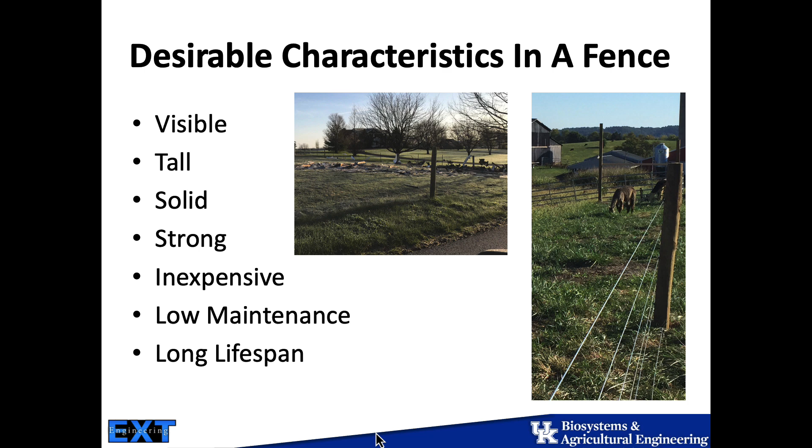Our goal today, again, is to help you build a fence that's going to last 20 to 25 years. If you do that and you choose good materials, then I think that can be accomplished with some minimal maintenance. So these are common fencing types that we see here in Kentucky. Wooden plank, and we've got woven wire fence. That'd be our traditional hinge joint type of woven wire fence, usually with a less than ideal galvanization on it, so it lasts 4 or 5 years and then it starts to rust.

We've got a better type of woven wire fence, and that's a fixed knot high tensile fence. That'll be the one we're showing you all how to put up today. That's got a class 3 galvanization or better. That's going to last 20 to 25 years without rusting. We've got a smooth high tensile electrified fence.

We generally don't recommend smooth high tensile fence without electric on it, because animals will tend to stick their heads through that fence and push the wires apart. So really high tensile fence needs to be electrified, and we'll talk more about that. We'll have a demonstration of a subdivision fence that's constructed with smooth high tensile wire, these black insulated line posts, and it will be electrified.

And then we have barbed wire. Commonly, when we talk about barbed wire, people think about that as a low-cost option. And I'm going to show you some numbers from a fence cost calculator that shows that barbed wire is probably not always our lowest cost fence to put in. And it's not a great fence to install, and it's not a great fence to maintain.

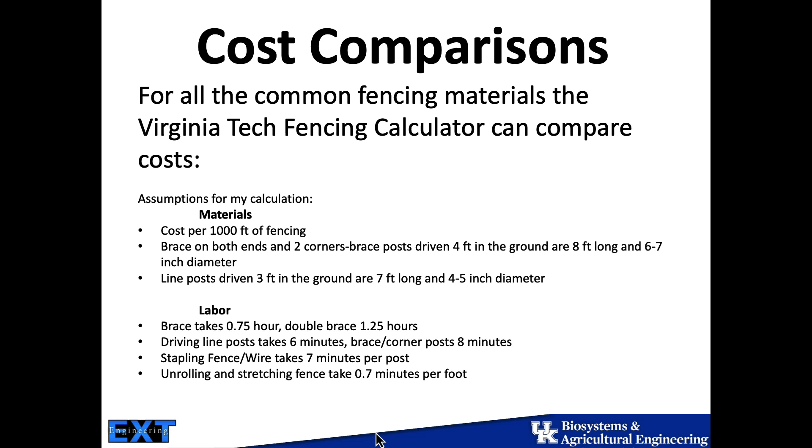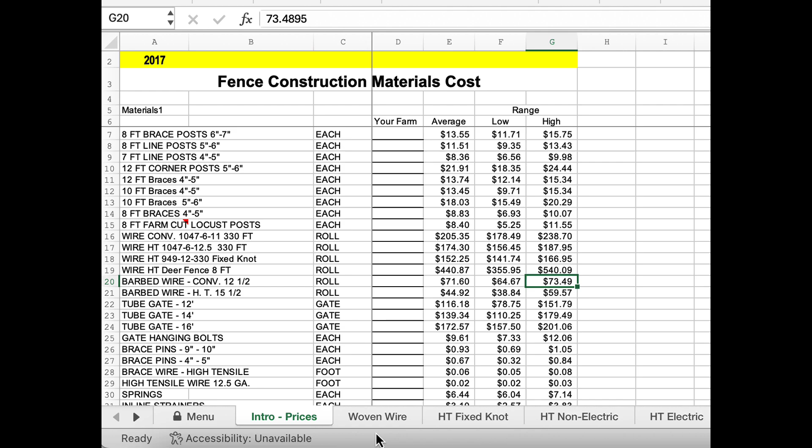And this is kind of what the calculator looks like. So this is the main menu, and it's got different types of fencing on there. You can click on that, and it'll take you to that spreadsheet. And then it'll allow you to put your actual costs in. It was probably last updated about 10 years ago, maybe a little bit less, but it puts in an average cost and then a high and low price range. And then you can put in a cost for your own farm to do the calculations. And this is kind of what one of those sheets would look like after you put the data in and what you want to use for your particular fencing project.

So let's talk just a little bit about the different kinds of fence and then how much it costs for 1,000 linear feet of that fence. So the first one is wood plank fence. Probably our most aesthetically pleasing fence, right? When I look at a fence, if I want to look at something that's really beautiful, I go to horse country around Lexington and I look at a board fence like that. Gorgeous, right? Expensive. It's expensive to build, and it's expensive to maintain. So that's two downfalls of a board fence.

The other thing about this fence is it's a very nice visual or physical barrier, so they can see it well and they can respect it. That doesn't mean they won't rub on that fence and push the boards off. They probably will. That's generally why we recommend a 4-board fence and not a 3. 3 will keep animals in, but if you've got a 3 and they push a board off, then you've got two boards holding them in. A lot of horse farms around Lexington will actually use one electrified hot wire on the inside of this fence, behind one of the boards, and that will keep pressure off of that board fence and prolong the life of that board fence. So a really nice fence.

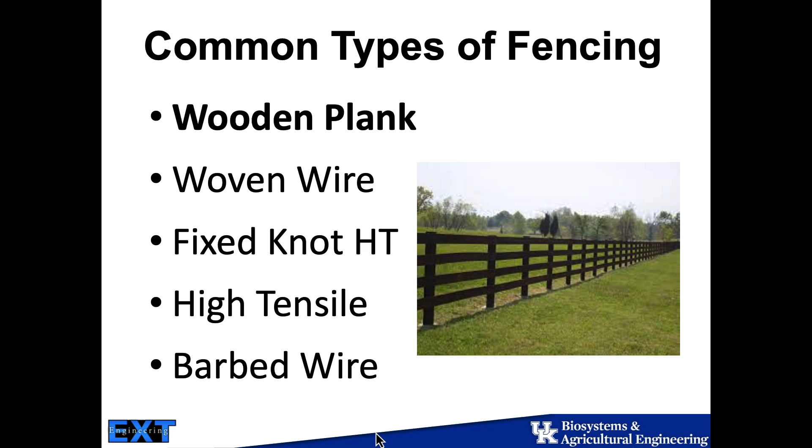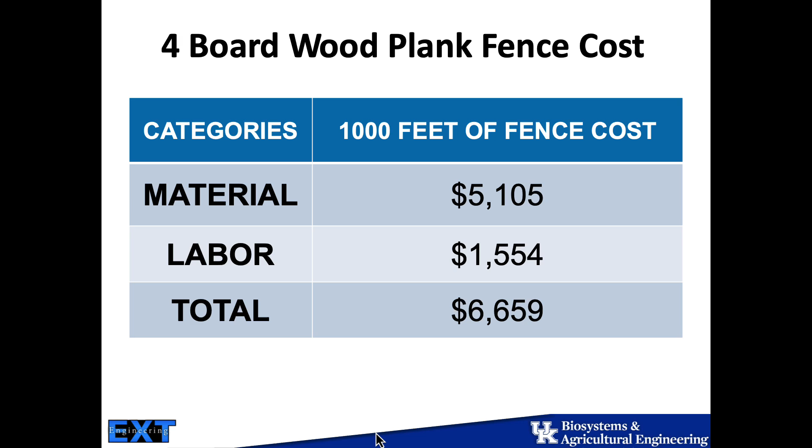That's what my wife would like to have at our place, but we have smooth high tensile electrified because it was relatively inexpensive. So this is the cost of materials that Morgan estimated, about $5,000 per 1,000 linear feet of fence. Labor was about $1,500, and the total was about $6,600 for 1,000 linear feet. And if you put that on a per foot basis, that's $6.65.

Is that what a contractor would charge you to put this fence in? Not even close, right? What's a contractor going to charge for a 4-board fence? Well, around $9 a foot. Yeah. You're lucky if you can get $9 a foot. We had some put at the research station after a tornado, $30 a foot. Well, you've got to figure on those prices now; again, it's relative cost, but the cost of wood and posts and all that is crazy. Yeah. So this is an expensive option for fencing. A beautiful option, but very expensive. And again, remember, this is before it was painted, so this does not even include painting of the fence. So that's going to be an additional cost, which I have no idea how much that would cost.

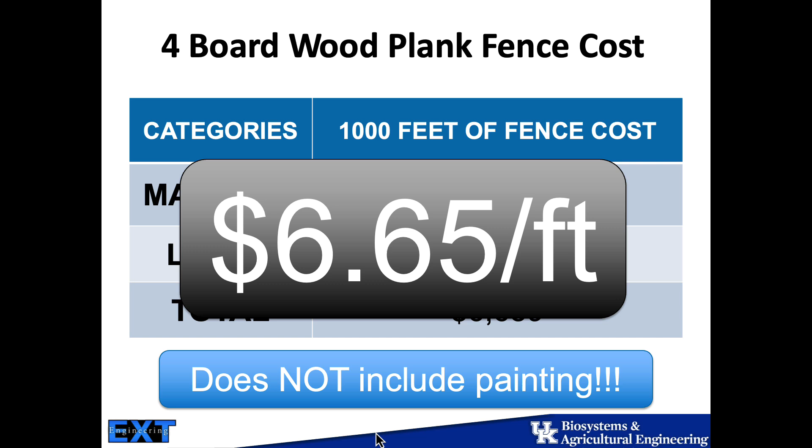Okay, let's look at a traditional woven wire fence. So this would be like you would get at the farm store or TSC, kind of a lower quality woven wire fence, not high tensile metal in it, kind of low carbon steel, and probably less than ideal galvanization. So commercial galvanization, which would tend to rust in 4 to 5 years. A lot of this fence has been put up through the country. I'm not saying it's a bad fence, but there may be better options than this fence. Again, it's a nice physical barrier. It's also visible so animals can see it and respect it. So it can be a good option.

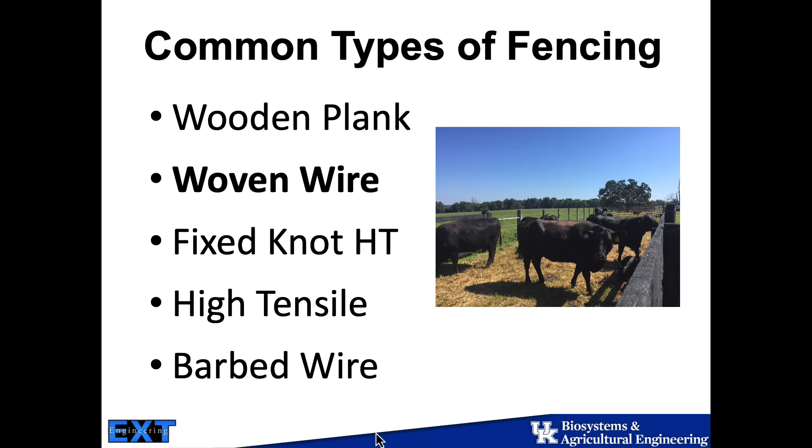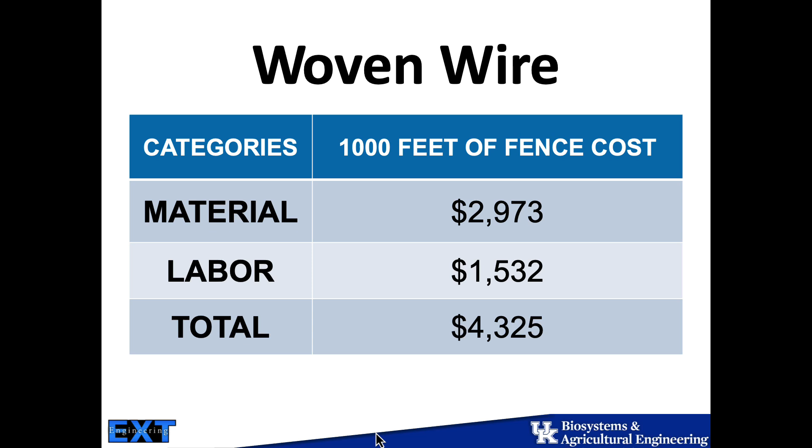In Peyton, we'll talk more about fixed knot and hinge joint woven wire, which would be this woven wire that we're talking about right now. So what I want you to look at is the total cost here. Materials are around $3,000, $1,500 for labor per 1,000 linear feet. And if I do the math on that, it comes out to be about $4.33 a foot. So remember that number as we go on through the slides here. So $4.33 a foot for a kind of a traditional woven wire fence.

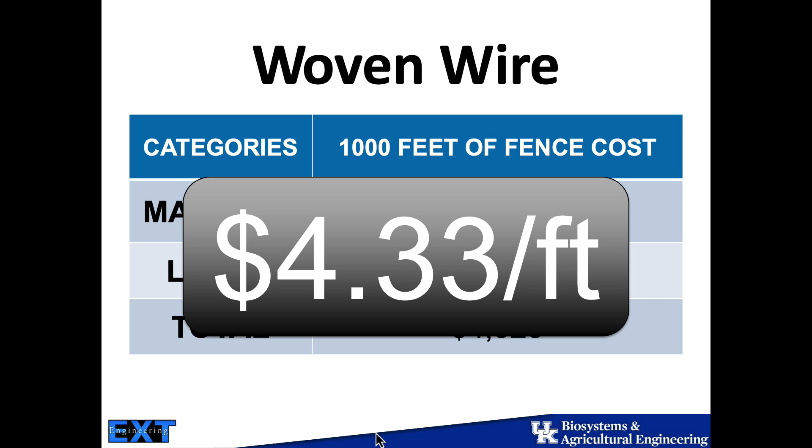So we're going to talk about another type of woven wire fence with this one. This is a fixed knot woven wire fence. Several different manufacturers. Peyton is with Stay-Tuff Fencing, and they make a really high quality product, and we're going to install that today. We're going to install a fixed knot woven wire fence with a 6-inch box on it. And it has a class 3 galvanization on it, so it's going to last 20 or 25 years before it starts to rust. This is really a high quality fence.

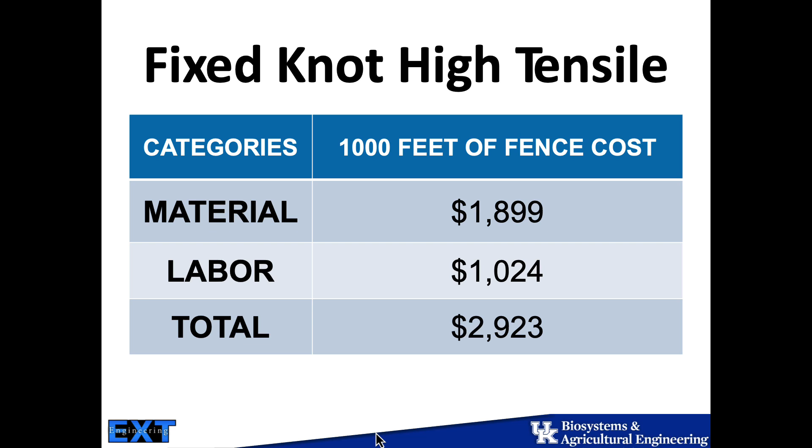It's made out of high tensile steel, so it has more carbon in it, which makes it stretch less than a low carbon steel, so it stays tight for a longer period of time. When we look at the cost of this, the materials, and that would include the posts and the fencing materials, is about $1,899, so $1,900 per 1,000 linear feet. Labor was about $1,000, and the total cost was $2,900 per 1,000 linear feet, or about $2.92 a foot.

Why is it less? It's a better fence than a hinge joint woven wire fence. Why does it cost less? Anybody know? Less posts. That's exactly right. So what would a post spacing be on a traditional woven wire fence? 8 to 10 foot. That's right.

On this fence, because it's a high tensile material, we can go further between posts, and posts are really expensive right now. So when we go further between posts, we can go anywhere between 15 and 20 feet between a post. We're going to do about 20 foot today on a relatively flat area at the farm for the demonstration. And that significantly lowers the cost of installing that fence. So this is a better fence for a lower cost.

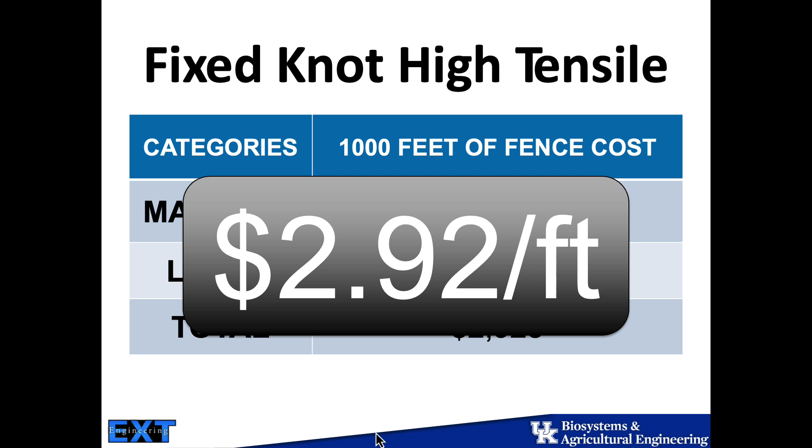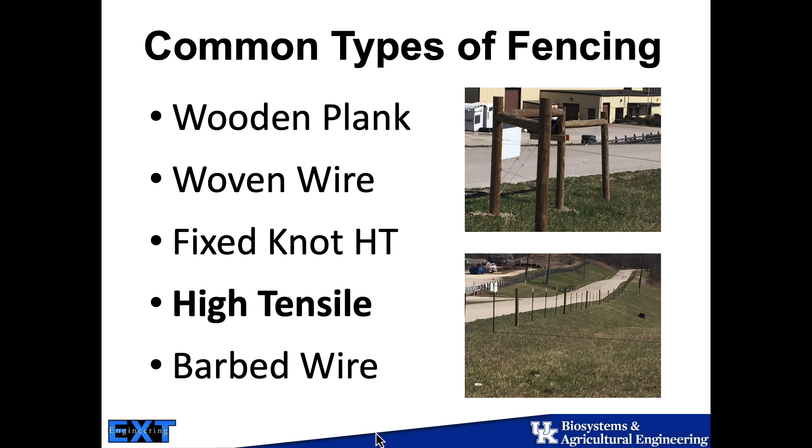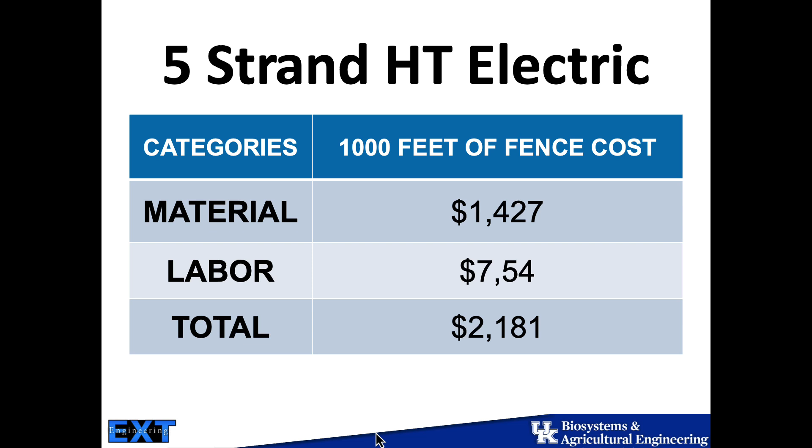Let's look at the cost of just a traditional high tensile fence that would be electrified. So that's a smooth high tensile fence. We're going to put up 700 feet of that at the farm this afternoon. It'll be a 2-strand subdivision fence in the interior of the pasture that'll be electrified. And so we'll just take a look at what Morgan has. So the materials are around $1,400 per 1,000 linear feet. $750 installation labor, $2,100, so that comes out to be about $2.18 a foot.

So pretty good buy. What do you remember? Did you do the calculation on what the fence was? So today, the one that we installed, the 2-strand, that's 700 feet on the farm subdivision fence, using those posts right there, came out to be about 40 to 50 cents a foot. So a pretty good buy for a subdivision fence that's going to last 20 to 30 years.

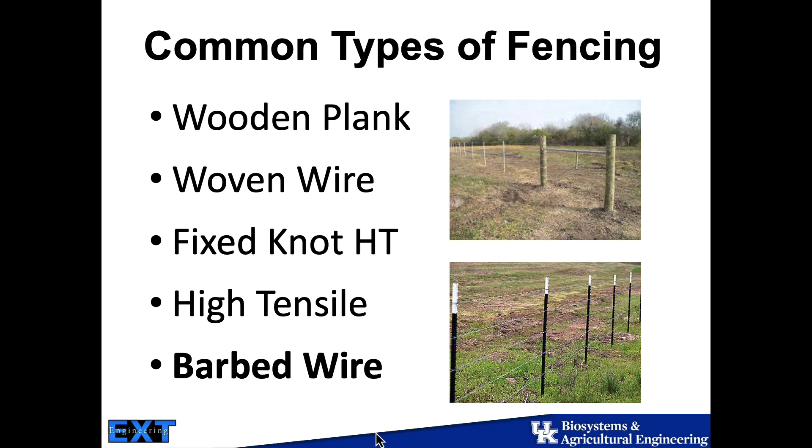Okay, last one is the beloved barbed wire fence. And Lord knows we had a lot of barbed wire fence on the farm I grew up on. Not my favorite kind of fence to work with, right? It is pretty effective. It's a good physical barrier, pretty good visual barrier, because you're putting multiple strands up, and the posts are fairly close together.

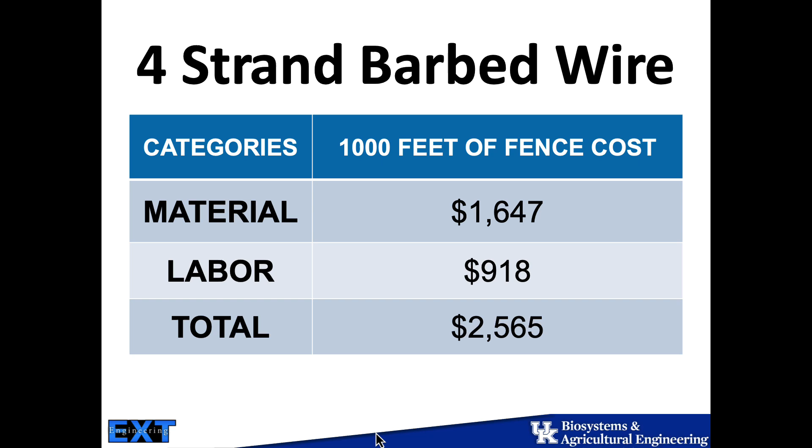When we look at costs, it's about $1,600 for material per 1,000 linear feet. About $1,000 for installation costs, so about $2,500. And what I want you to think about for a second is that if it's costing you about $2.50 a foot, and this is all relative to the other fences right now, but $2.50 for this fence, or I could put up a fixed knot woven wire fence for $2.90 a foot. It's probably a pretty good investment to put up that fixed knot woven wire fence long term.

Just mention posts, and we'll talk more about posts when we go to the farm. When we buy a pressure-treated fence post, we expect it to last somewhere between 25 and 35 years, depending on the diameter of the post and how well it was treated. And that would be a pine post that was treated with a CCA, which is chromium copper arsenate. So don't chew on the post, right?

Now, we'll point this out at the farm, but there's different types of pressure-treated posts. There's a post called a perfect post, and that's one where they put it in a machine that shaves off the outside of it to make it a perfect diameter on each end. So that would be 4 inches on one end, 4 inches on the other end. We do not recommend those posts. When we shave off that outer part of the post, it makes the post weaker. And so we recommend that you use a post that has not been turned like that.

And when you use a post like that, it'll have a large end and a small end. That's how you tell usually, and maybe a little bit of bark on the post. And that's a better post. They're not as pretty as a turned post, but the durability and the strength are much better. I've got a perfect post to show you, and we also have the post that we would recommend that you use. So the lifespan, again, is somewhere between 25 and 35 years, and I'd say medium to high initial cost, and then maintenance would be relatively low. These should last a long time if they're treated well.

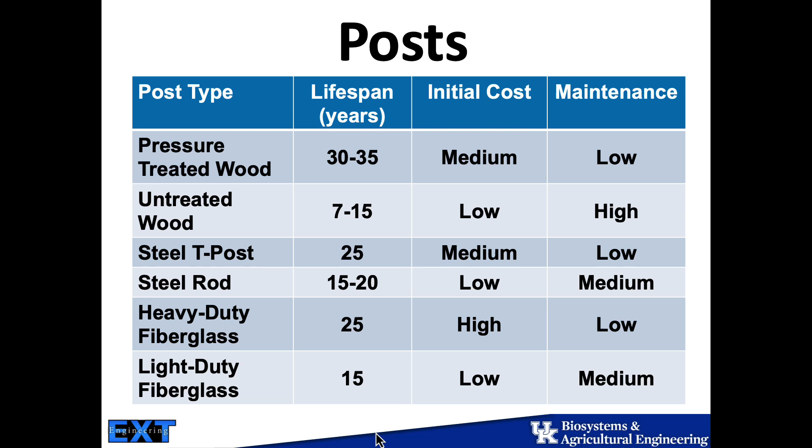Heavy-duty fiberglass posts or some poly posts, we would expect to get 25 years off. Pretty high initial cost, pretty low maintenance. If you use a smaller diameter fiberglass post, they'll be cheaper but won't last quite as long. The point of this slide is get good materials, materials that you know are going to last for the lifespan of that fence.

Okay, just a little bit on fence planning, and we'll go through this kind of quick. We need to really think about where we want our permanent fences on the farm. If you're just starting out and you're thinking, well, maybe I should put the fence there or there, the best thing you can do is build a good solid perimeter fence, probably a fixed knot high tensile perimeter fence. Make sure it's nice and clean when you build it, and Peyton will talk about that. And then start to subdivide that farm with polywire. And that's temporary fencing with step-in posts.

And it's really easy when I put a polywire fence up. I can do it pretty quick. And then I decide, well, it's not quite where I wanted it. I can move it really easy. If I go in and I drive a bunch of 5 to 6 inch wood posts in, chances are that fence is staying where you drove it in, right?

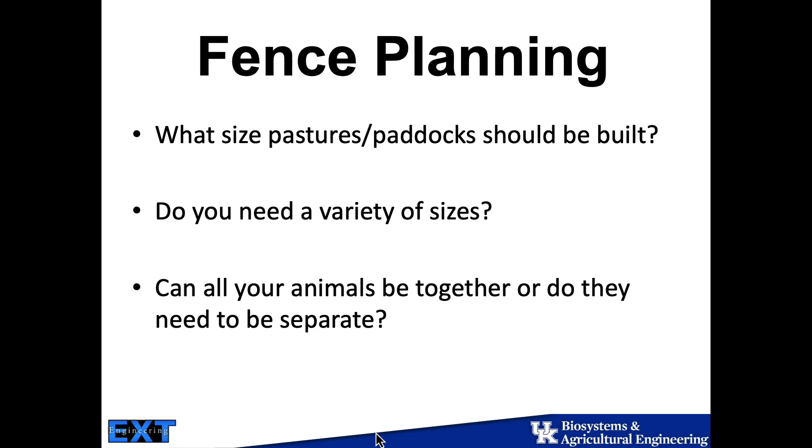So for that initial planning and setup stage, using polywire with temporary step-in posts is really a good option for figuring out where you want your permanent fences to be. And after you have those permanent subdivisions established, then you can go in and put in a permanent fence on those subdivision lines. And that's kind of what this slide talked a little bit about.

Okay, the last thing I want to mention, and we're going to do this today out at the farm, so this will be the third type of fence that we're installing, is going to be a single strand of high tensile fence that's electrified on the inside of a woven wire fence. And there's a couple different options for doing this. If you have a new fence that's really tight, like the one we're going to install today, we can use a wood post offset, and we would drill a hole in the post, drive this into the post, put a staple over it, and then run one single wire through here. And this is a really good option.

There's a number of different offsets. This is probably one of the better ones. This is called a ring top offset. There's no metal in the end here. It's kind of a fiberglass material, and it's very durable. It's harder than regular plastic. You can get a pigtail insulator one, which would be a metal core with a vinyl or polyvinyl plastic on the outside. But over time, that wears out and cracks, and it is not quite as good of a product. So again, use high quality products.

The other one that we'll be demonstrating today is a wire offset, and this is good for woven wire fence. So these legs, and we'll show you how to install these, and you all can actually install some this afternoon, twist onto the horizontal wires in a woven wire fence. And we can put this on a new woven wire fence like we're going to install, but this afternoon we're going to demonstrate on an old woven wire fence, and that's where these are really powerful.

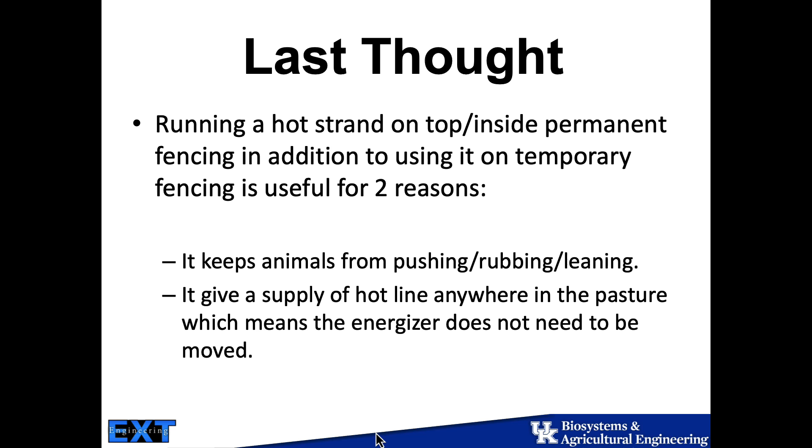Okay, are there any questions? Yes, sir. Okay, where I live, I noticed the fencing's always on the outside of the post. It's not on the inside of the pasture. Now, I agree it looks bad, but to me, as far as strength, it makes more sense for it to be on the inside of the pasture. That's where it should be, right? Regardless of the material. Yeah, so you want them pushing the pressure against the post. Yeah. Sometimes people will do that for aesthetic reasons, but we don't recommend that.

Yes, sir? Question about the treated posts, anecdotal. I had several creosote posts put in near some trees. A pretty big tree came down recently and the roots looked like they had been totally rotted off. Is there concern about vegetation with the treated posts? Is creosote worse than the newer ones, the CCA, I think you said it was? Yeah. So generally we recommend the CCA treated posts. People will use creosote posts, but they're kind of nasty to install. They stink forever. Yeah, and they do smell. They're getting harder.

You can't hardly find them anymore. Right. Yeah, I probably wouldn't use them anyway just because of tar and stuff. Like they put it in near a waterway too, so I'm thinking I can see the sheen in the water from the post. Yeah, I don't know about the environment. They're probably not what I would say would be environmentally friendly posts, but well, they both have toxins in them to keep microbes and fungi and bacteria from breaking the wood down, right? But these creosote ones are probably worse. They're probably moving off of the post. Yeah. Any other questions?